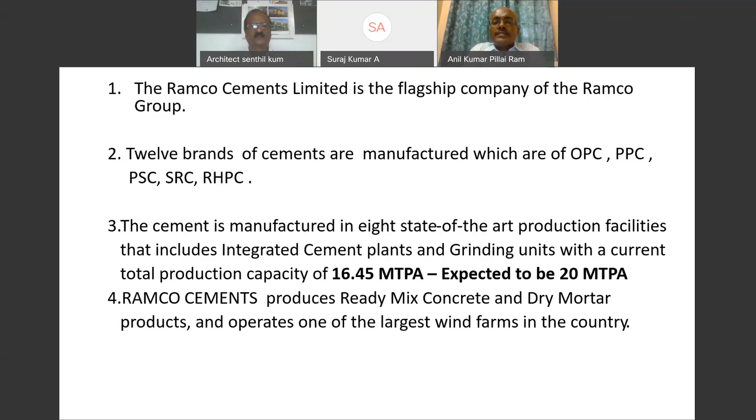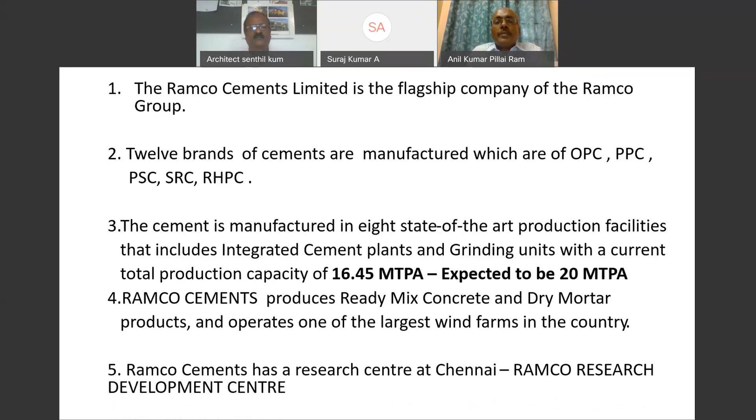Apart from manufacturing cements, Ramco is also involved in dry mortar products as well as ready-mix concrete, and we operate one of the largest wind farms in the country, related to renewable energy. We also have a research center at Chennai, the Ramco Research and Development Center, which engages in the testing of cement as well as raw materials for the manufacture of cement and the concrete mix designs.

Just a brief overview, because there are some questions on which cement is better for building construction, that's why we manufacture all these types of cement. Ordinary Portland cement has 4 variants, specifically meant for infrastructure works, where you need longer slump retention time in concrete, so one needs to go in for 43 grade infra or 53 grade infra. Then for precast items, we have the rapid hardening Portland cement, the Ramco Super Fast.

Portland Pozzolana cement is the cement which has to be used for all normal residential buildings, because it gives the advantage of both durability and compressive strength. Within that, we have Ramco Super Grade. Then a special cement for concrete, Ramco Super Crete, which has a high rate of gain of strength as well as low heat of hydration, so that is the advantage of that.

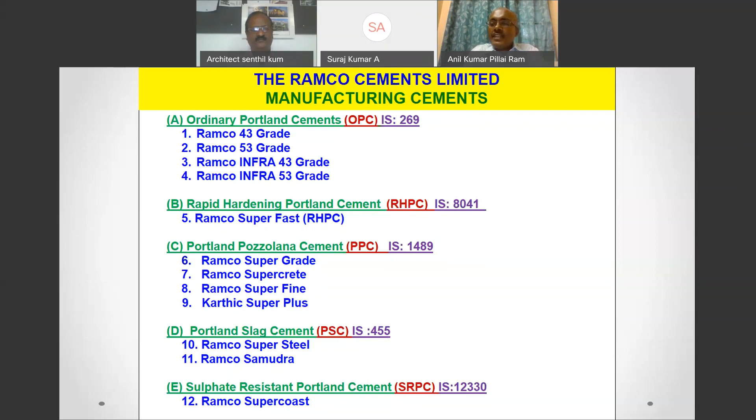Then we have the Portland slag cement, Ramco Super Steel, Ramco Samudra, which is basically sold in the eastern part of the country. And then we have the sulfate resisting Portland cement, the Ramco Super Coast, which is used in areas where there is high percentage or high concentration of sulfates. So these are the 12 types of cement, and what we normally advise for building construction is the Portland Pozzolana cement as well as the Portland slag cement. Basically, PPC is widely being used for all building construction across the country.

Some of our major customers, which I'm not going to go into detail, but just for the benefit of the viewers, L&T is using our cement for a variety of concreting works at various sites, for concrete which is exposed to different exposure conditions.

ITD Cementation Company, which is also involved in various works, especially ports, infrastructure works, and many construction companies in the eastern part of the country, Haldia Development Authority, and institutions like metro projects such as Bangalore Metro and Cochin Metro have approved our brand. This is an overview of our research and development center at Chennai on the old Mahabalipuram road, where we are involved in various types of tests.

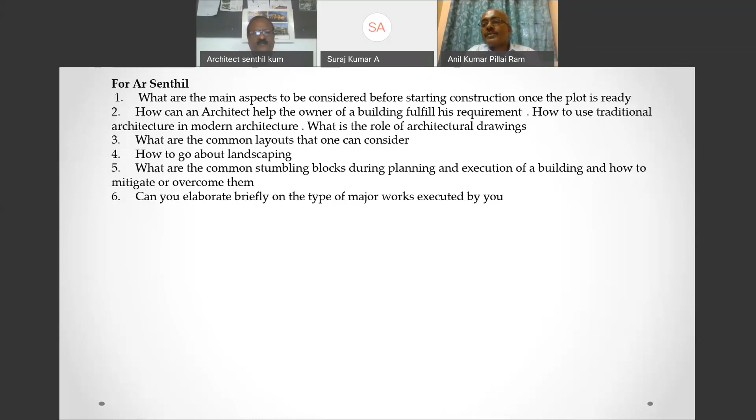We have a combination of questions received from customers, ranging from architectural to civil, and we will be taking each one. But before that, let me invite architect Senthil Kumar to touch upon the main aspects to be considered before starting construction once the plot is ready, how an architect can help the owner fulfill his requirements, common layouts one can consider, and about landscaping, so it would be useful for viewers, both customers and construction professionals.

Over to you. Thank you, Mr. Anil. The mic is, I think, now unmuted. Is it audible now? Yes, now it is audible.

I should extremely thank Ramco Cements for giving me this opportunity, Mr. Anil Pillai and Mr. Suraj, to interact with you and clarify your doubts, and to share my views on this subject. Mr. Anil Pillai, you've put forth a lot of questions to me. Do you want me to answer them first and then go to the PPT, or whichever way you prefer? Would you like me to repeat those questions?

First, many owners would be willing to know the main aspects they should consider before starting construction, once the plot is ready. Once the plot is ready, you'll have to get approval from the concerned authorities. Most approvals have become online now, no more manual processes. You have to upload it online, whether it's a municipality, a corporation, a village, or a city. It has to be uploaded only online, so the approval process has to be clearly done.

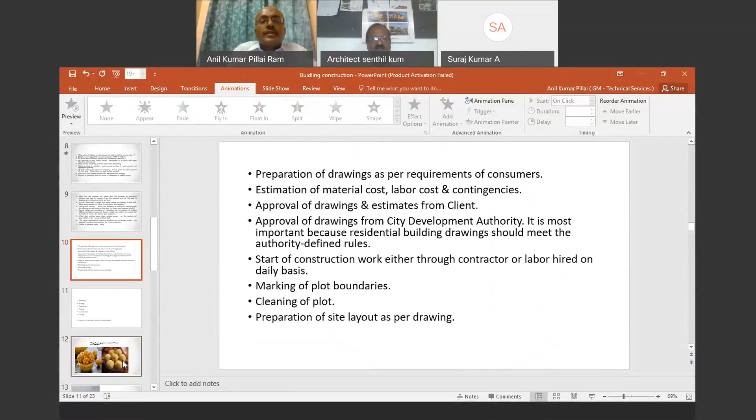For example, I think one of the most important things is that many customers would go in for concreting. So while concreting, a good plan is essential, right from batching. Batching means how we are going to mix, whether in terms of volume or weight. Then mixing, whether we have an adequate mixer machine at site, how we are going to transport the concrete, how we are going to place the concrete, and compaction and curing.

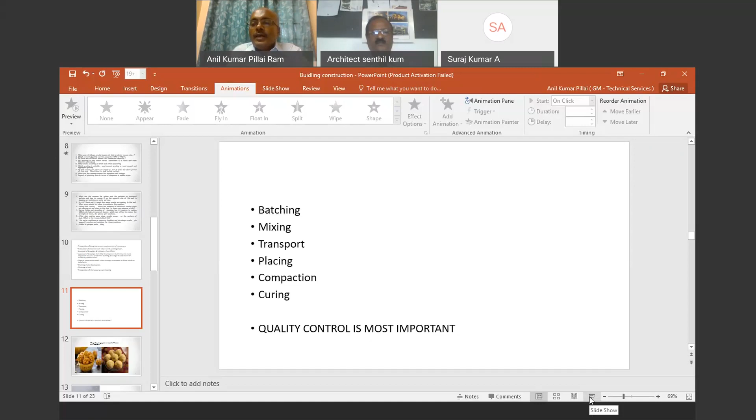Quality control is the most important aspect, as we all know, in concrete construction. Without quality control, you cannot make good quality concrete. Many problems, like leakages, can be avoided if you are doing very good compaction along with good quality concrete, and curing is very essential.

I would like, since most of them are customers, to explain the various sizes of aggregates, which is very important. Like this typical sweet we have in South India - the first sweet where you have kadalai mittai, which has only coarse aggregate, and the other has only fine aggregate. So a combination of coarse and fine aggregate is what we need for good quality concrete.

In the first picture, you could see there is almost only coarse, and here there is fine. What happens if we combine this coarse as well as fine aggregate? That is where the role of 10mm, 20mm aggregate and sand comes into play.

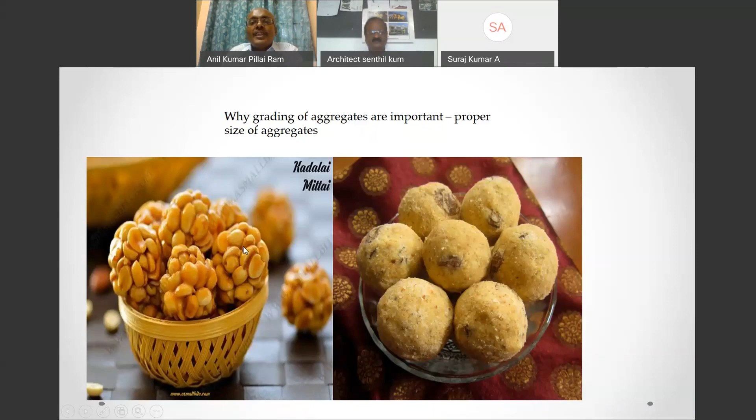So when we are able to mix both of them, we get a good quality concrete. Another thing is the water cement ratio. Say, for example, you buy the best quality cement, you have the best quality sand, you have the best quality aggregate, but if your cohesion is not good, and if the consistency is not good, I think your output would not be good at all. So it is very important that we pay attention to the quantity of water being added.

And have a very good water cement ratio. Another thing is that when we talk about batching, placing, compaction, curing, all the steps have to be followed if you have to have a good quality concrete. Similar to how we make a chapati, you got to have the best quality flour, mix it so there is no excess water, and while making it, ensure it comes out very well. So similar is the case with concrete as well.

So those are some of the good quality construction practices which one must follow to make a good quality concrete. Pay attention to all that, and then you may not have to go in for repair of cracks. Cracks will not occur if your water cement ratio is good and if you're able to do effective curing. Hairline cracks will not occur if you pay attention to that.

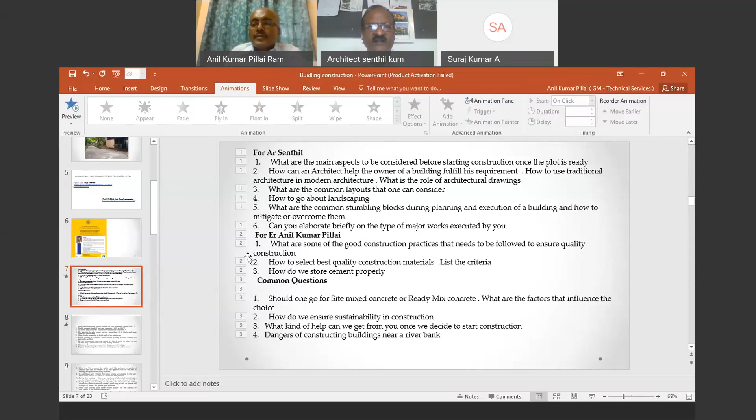And the client will not have the time to go to the site and check all these things. So a site engineer has to be appointed. Normally, the civil contractor who undertakes a job has to have a site engineer at site. These labor contractors will not have site engineers, so it becomes a big headache. So you always give it to a contractor who can afford to have his own site engineer who will come to the site, because you cannot expect the contractor to come and stand there full time and see the quality of construction. So the site engineer's job is a must.

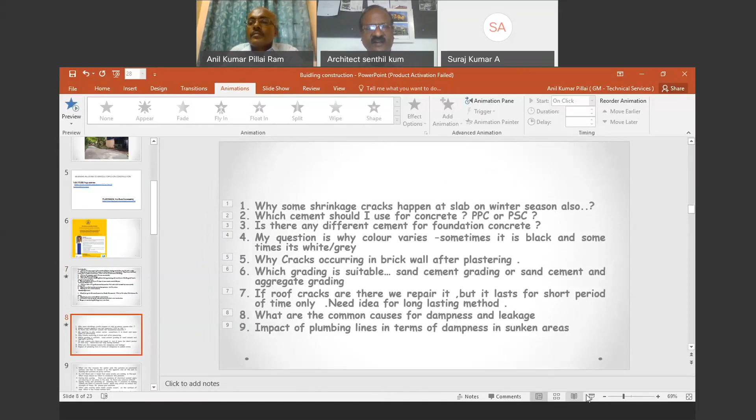For small works, the contractor himself can appoint the site engineer. For big works, the client has to appoint the site engineer. It is the site engineer's job to check all the quality of works and report to the architect, civil engineer, or structural engineer. For example, after concreting, how the concrete quality has come. We normally see cracks happening in ready mix concrete, so if cracks are happening, what is the reason for that? All these things should be observed and reported to the structural engineer, who'll give the remedies. So the site engineer plays a very important role in all the sites.

That's what some of the questions that have been asked, I think already it has been answered. Some shrinkage cracks happen at the slab even during winter season. Why? Because many times excess water cement ratio is also being used. For example, if we have a very highly flowable concrete and we do not do the curing, then shrinkage cracks will occur. So as rightly pointed out by architect Senthil Kumar, we must be having a very good civil engineer who would be able to supervise that.

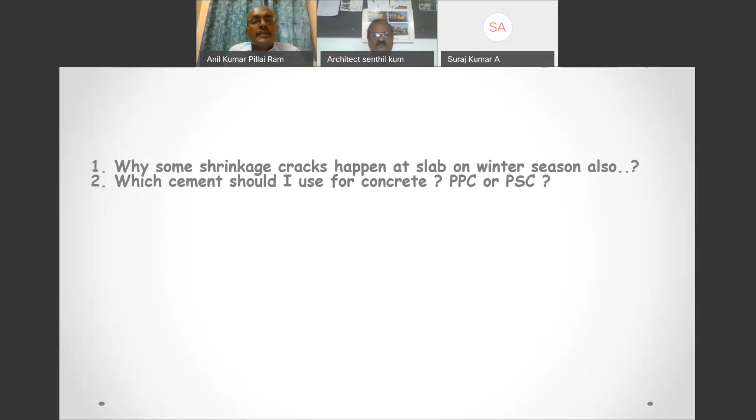And which cement should I use for concrete? If you are using it for building construction, I would recommend you go for blended cement. But for ready mix concrete, normally use ordinary Portland cement because they have a separate blending material which they are able to procure, but at site we are not able to mix blending material along with cement. The role of blending material is that you will be getting a low heat of hydration and enhanced durability. Is there any different type of cement for foundation concrete?

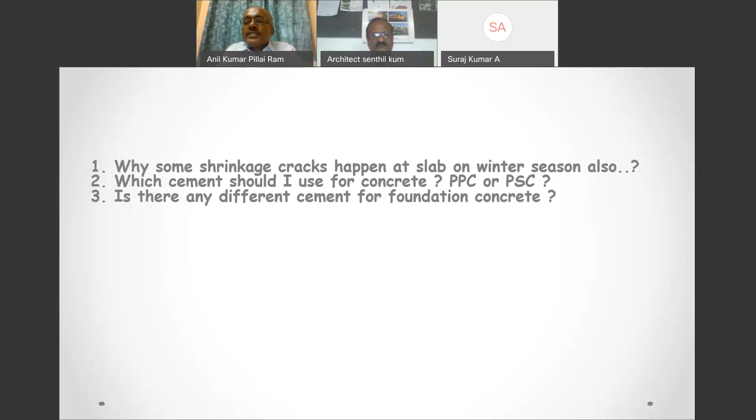I think for all concrete, if it is M20, M25 grade, it all depends on the mix design or the mix proportion that one is using. So why does color vary? Actually, there is one question regarding cement. I think the color of the cement varies from dark gray to light gray.

There is no standard color prescribed in the test certificate, because the test certificate talks about setting time of cement, compressive strength of cement, fineness of cement. It does not talk about color. So you don't have to worry about the color of the cement. It is not an index to quality. That is very important.

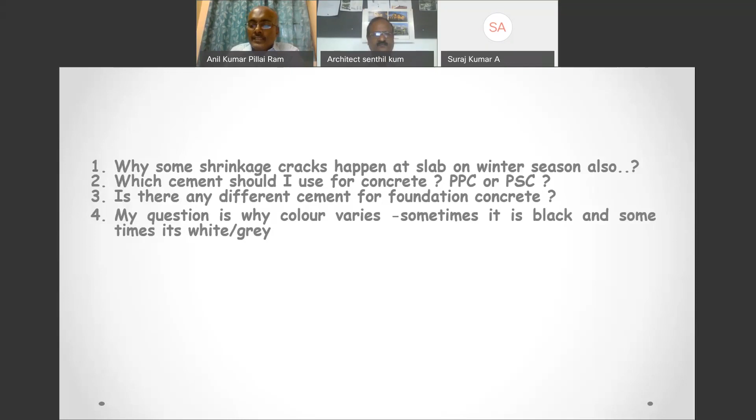Why do cracks occur in brick walls after plastering? I think this is an important question. Bricks have to be soaked before using, otherwise the brick will absorb water from the plastering, and if the plastered surface is not cured properly, you will get hairline cracks.

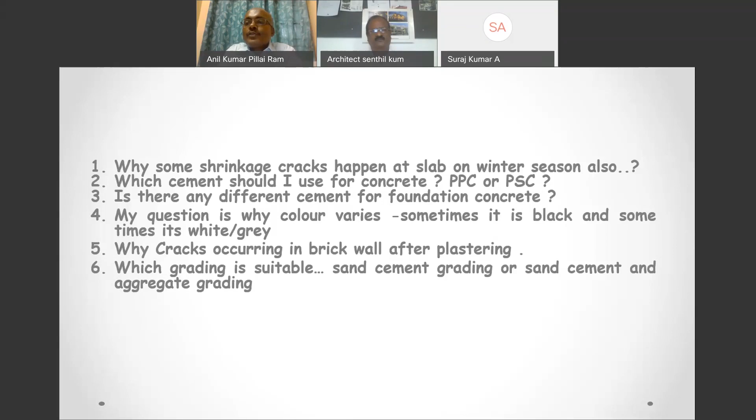Which grading is suitable, sand cement grading or sand cement and aggregate grading? Sand cement grading is used for plastering, and sand cement and aggregate is used for concrete, as simple as that. So if roof cracks are there, we repair it, but it lasts for a short period of time.

Need an idea for a long lasting method. We should ensure that the concreting is done in such a way that no cracks occur, because prevention is better than cure. But if cracks occur, then it has to be done by a professional, who opens it up and puts in some kind of compound. But it is always better to take preventive measures to avoid hairline cracks.

What are some common causes for dampness and leakage? I think dampness and leakage occur because of inadequate compaction. So compaction during concreting is very important, and we need to pay more attention to that.

Regarding the impact of plumbing lines on dampness in sunken areas, we need to plan the plumbing lines effectively, as the speaker has stressed. Even on the terrace, we need to plan it so that you don't have much leakage. So these are some of the questions we have been able to take care of.

Anything you would like to add on these questions, architect sir? Yeah, most of them are related to structural aspects.

The structural engineer also plays a very important role in buildings, and you should make sure that the structural engineer visits the site at the time of concreting. He has to come and check the reinforcement before concreting, whether it is done as per his drawing and requirements. If anything has to be redone, it has to be redone, and he'll give instructions. During concreting also, we have to follow the structural engineer's instructions, and he plays a very important role.

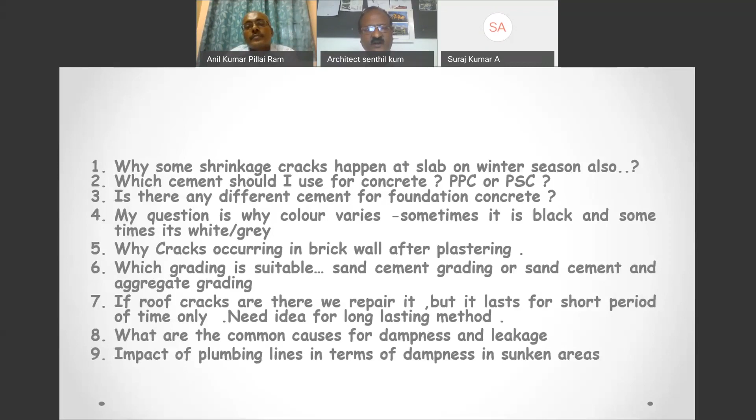So without the structural engineer, you should not construct a building. Sometimes the masons will say, sir, this reinforcement is enough for the column, we'll put 4 number 20 mm bars for the slab. You have to have a structural engineer depending upon the soil condition.

So soil testing is also very important. Depending upon the soil testing and the type of soil, your structure will be calculated. The structural engineer plays a very important role, and you can save enormous cost on the building.

If you go through unorganized professionals, they will put reinforcements as a thumb rule, and the cost will become high. If you go through a professional like a structural engineer, then you can economize on the cost, and the building safety will also be ensured.

The safety aspect, nowadays earthquake resistant buildings are a must. As per the IS code, your buildings are to be designed, the columns are to be designed to withstand the earthquake. So all these aspects have to be considered while designing the foundation and all the structural aspects of the building.

I think what is very important is that structural drawing is also important along with architectural drawing. That is very important. And as rightly pointed out, most of these problems mentioned here can be sorted out if we plan it properly and go through a professional.

For example, patches on a plastered surface happen because plastering has to be done very professionally to avoid patches or cracks. The right kind of mix proportion has to be used, whether it is for ceiling plaster or wall plaster. Ceiling plaster has to be slightly rich, sometimes they use a 1:3 mix, while wall plaster goes for a leaner mix. We also need to ensure that in AAC blocks or brick walls, the blocks are sufficiently moistened.

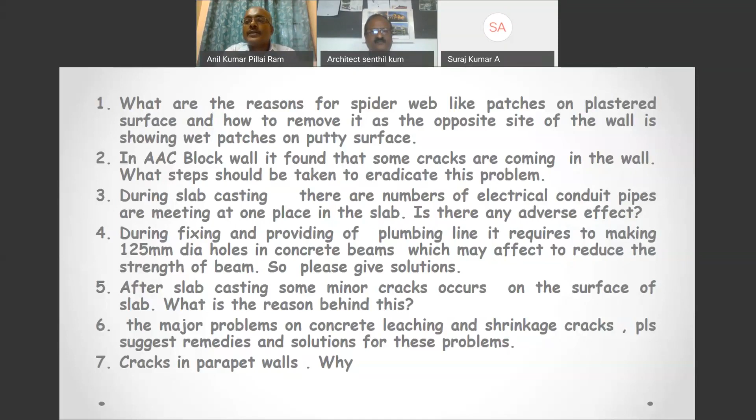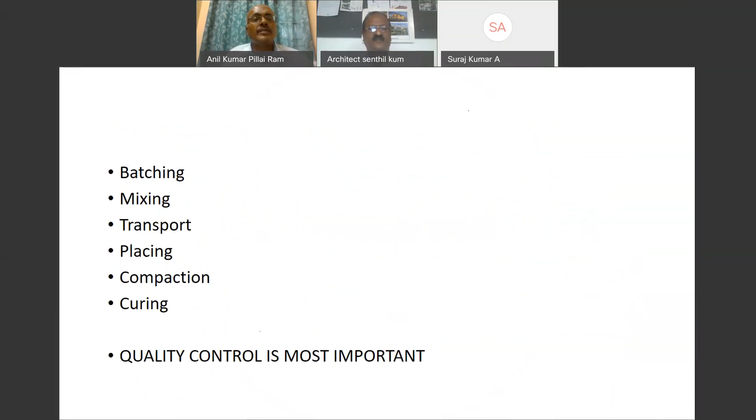So these are some of the answers to the questions which are there. Anything you would like to add on this? I think you have clearly explained these things. We will go to the next. Yeah, so these are some of the questions. I think now you can show the projects that you are having. We have almost covered, and you can carry on with your presentation.

I'll try to show some of the projects. I think you will be, yes please. You can share your screen there, then I will come back to this. Some of the projects executed by you would be an eye opener for all of us to see how we can.

Yeah, I think from the design perspective, these are some of the 10 elements we can consider when one designs a building.

Always you should involve nature in the building. Nature has to be a part of it. Whenever you design a building, you have to bring nature into your building. Then only your building will become timeless.

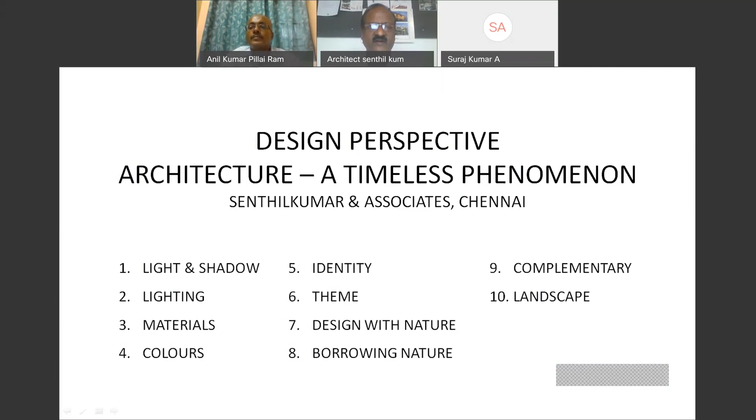In this, you should just show some of this. This is my residence in Manapakkam. You can see the solids and voids. Are you able to see my mouse? Yes. So this is the eastern side.

Always we should allow the eastern side to fall in the building. That's why the building has got, this is the master bedroom, it has got a stagger, the dining has got a stagger, and the living has got a stagger. So the eastern sunlight will fall in the kitchen, which is very good, which will kill all the germs, and then eastern sunlight will fall in the dining, and eastern sunlight will fall in the master bedroom.

As per Vastu, they say that the master bedroom should be in the southwest corner. From the southwest corner, having the bedroom there, how do you bring the eastern sunlight? That's a challenge. If you just stagger it, you get the eastern sunlight, while still having the bedroom in the southwest corner.

And there's a big landscape. Here we are able to have a huge beam, without any columns in between, for a 36 feet span, with only 2 columns. We can accommodate 4 cars comfortably inside, with no columns in between, and the slab has been sunken.

On the top, we are able to accommodate a roof garden on the first floor. You can see the landscape occurring here, and the sunlight comes to the pergolas. So nature has to be integrated into the building wherever possible.

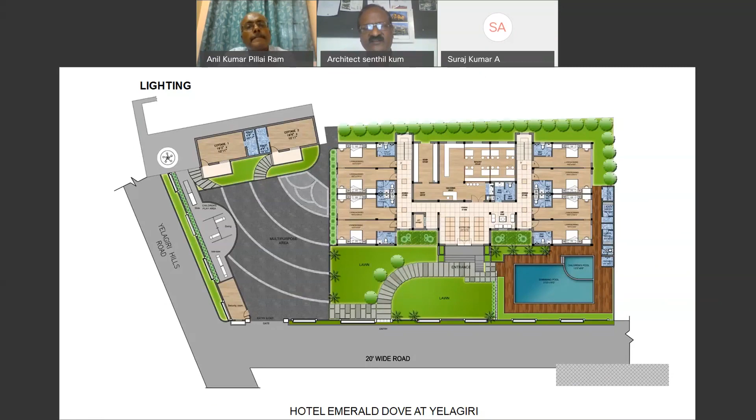Again, for good ventilation, we have this sort of jalis, which also gives privacy. This allows the wind to come into your rooms, and at the same time gives you privacy also. A lot of jalis are being used in Indonesia, and this gives a very nice lighting effect during daytime when you see the light. Especially on the walls facing west and south, to avoid glare, you can have this.

This again is a school project we have done. For schools, we go for the bright colors. Always in school, you should remember that the school will be constructed in phases. The elevation cannot be attained in only one stage. First year they'll construct something, second year they'll construct something, third year they'll construct something. So the building has to be envisaged in parts.

When you design the elevation, you design it only for the first year. Then again it has to be built for the second year, third year. So it has to be built in components. That is the message I'm trying to convey here.

Nowadays we see a lot of these glazed buildings, Alucobond, and glazings which have no character. Initially, when you see a building in Kerala, you can say that building belongs to Kerala only, because they'll have typical Kerala architecture, like large overhangs to cut the rain coming into the building, and for ventilation. But nowadays this universal modern trend has come, in which throughout India the same style has been followed, which maybe we are getting influenced by the Western era, but which is not a good trend.

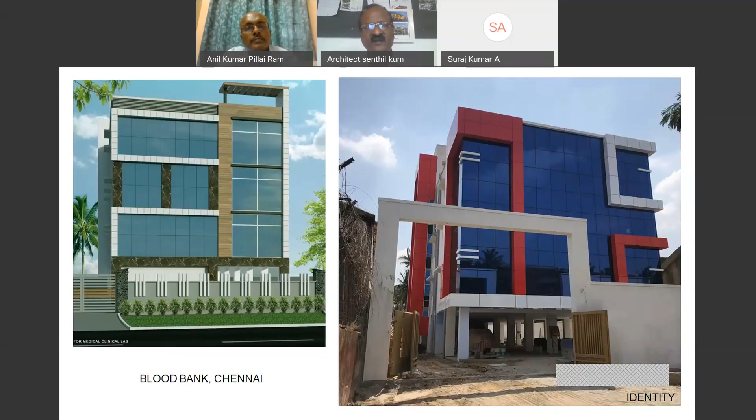And what is the life of these buildings? What is the life of this external cladding, and what is the life of this glass? Hardly 5 years or 10 years, something like that. But just to make a show, people are doing this, and this has to change. Your building should be responsive to the local climatic conditions, depending upon the locally available materials, and using the locally available masons and skilled laborers. That's how the building has to be designed.

See, this amphitheater, which we designed at National College Trichy, we used bricks from Kerala. The amphitheater has been designed like a musical instrument. This is like a piano, and the amphitheater is also designed like a flute. The flute will have 7 holes, 6 holes continuously, and the 7th hole will be at the last. When you see it clearly, you can just understand.

So whenever you design a particular place in a public area, you can have a theme, and the theme will add value to it. Here, music is the theme, like the piano type stage, and then flute type tiers, using all natural materials. This plays an important role.

This again is the ITC Welcome Resort on the ECR. You should not cut the trees. Maximum, you should try to fit in the requirements on the site, taking into account all the existing trees. That's one of the most important aspects which you have to consider when you plan the building.

See the lobby also, it is not air conditioned. When you enter into the lobby, it is fully open because the Bay of Bengal is here, and the breeze will flow through it, having a tunnel effect. You don't require any fans, no artificial light, nothing. Only at night time will you be requiring it. So the lobby has only the side walls and the roof covered. We are trying to borrow nature entirely. This is one of the important aspects.

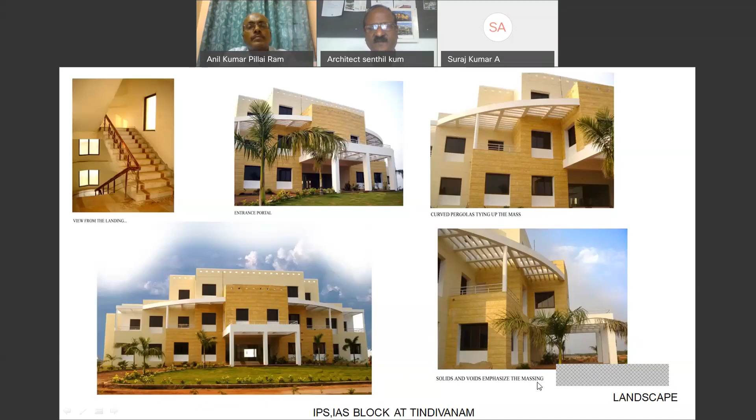It's much easier to go for astroturf, a synthetic lawn. You can conduct parties, put chairs, put the dining table there—whereas with a natural lawn that's not possible, since if you sit on a chair it will sink into the soil and create holes. So I prefer astroturf, with planter boxes for your natural plants everywhere—it's much easier.

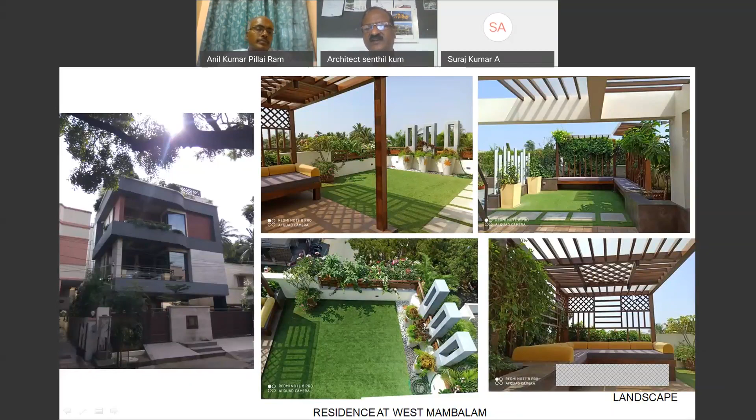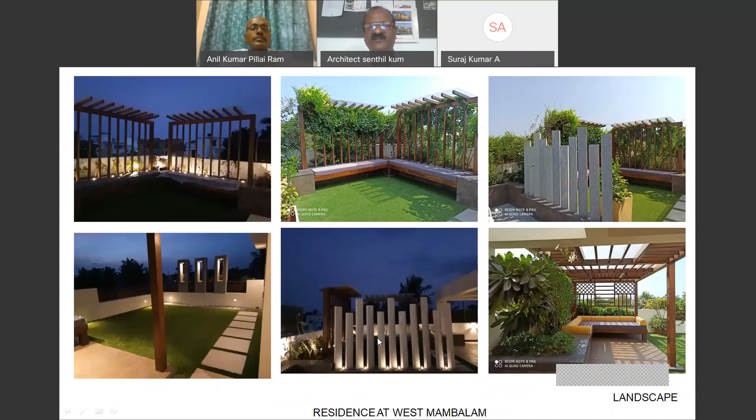These are the pergolas with seatings below, and you can have creepers on top. See these creepers and seatings with natural elements, along with some granite stones.

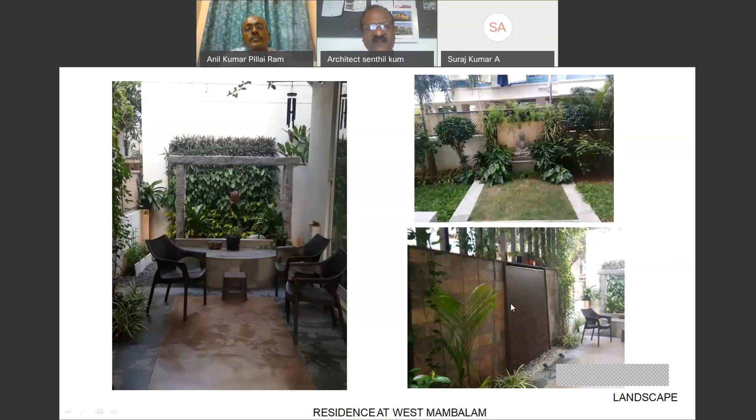That was a very interesting presentation on how you incorporated nature into the construction of the building. As we all know, today sustainability and green building is the order of the day, where we need to ensure that outside light is being used inside the building as much as possible, and that the building consumes lesser energy, because energy consumption is one of the most important things, as well as water conservation.

I think all this goes a long way in making the building sustainable, and that is one of the questions being asked: what do you mean by green building? I think this is what green building is all about - when we are able to incorporate the functionality and elements of nature. I'm sure with your expertise, especially during COVID time, we need to avoid the usage of air conditioning as much as possible. That is the message being given.

So how do we ensure that outside air and ventilation is being followed? I think that is a very interesting phenomenon that is going to happen in the coming days. And you have already implemented this in most of your projects. That's very interesting - you have to have cross ventilation. Cross ventilation, that is very important.

So let me just show some of the presentation. There are some questions on which sand is better and all that, so let me just show some presentation on that. Suraj, can you just convert that? Yeah.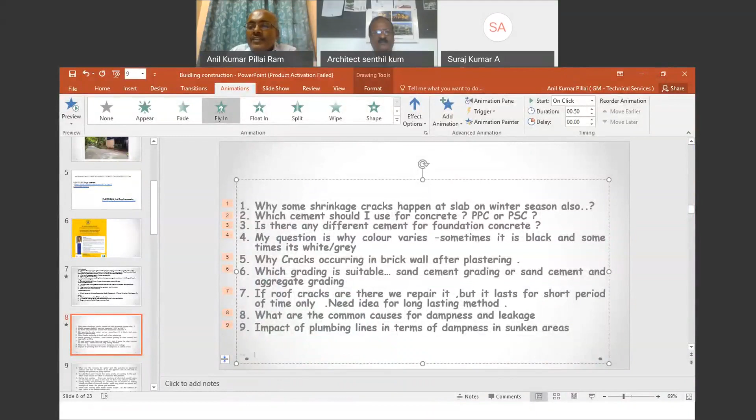There is a question on which is better, whether M sand is better or river sand is better, because that kind of question is always coming in the mind of construction professionals.

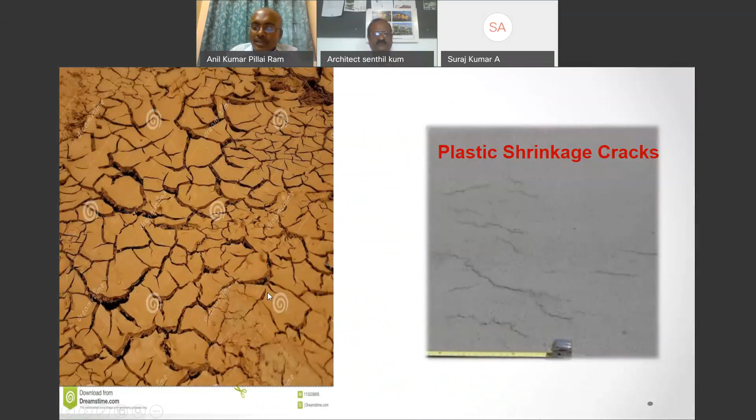Just before I go to the other thing, a comparison of why curing is important. On the left hand side, you can see this mud which is cracked because of quick drying of the surface - that is the reason why this plastic shrinkage crack is occurring. So we need to keep in mind the importance of curing. When a mud itself can get this kind of problem, you can understand what kind of problem occurs when we don't do proper curing.

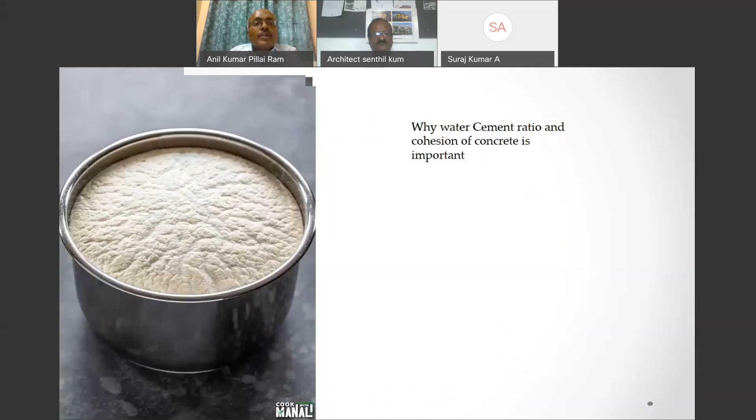Let me go to the question of which is better, river sand or M sand. As we all know, in many places river sand mining is stopped. If you are able to get a better sand which, for example, has below 75 micron fineness with clay and organic impurities almost equivalent to zero in M sand, whereas in river sand it is higher - these kinds of parameters have to be kept in mind.

As we all know, river sand is naturally available on river banks. M sand is manufactured, and in river sand there is no quality control because it comes from natural sources, whereas M sand can be made of consistent quality. It depends on the supplier from where you are taking it, because at times you will find fine materials below 75 micron - if dust is higher, it can create problems in concrete. So we need to look at the sizes of the sand and whether dust is minimized or not.

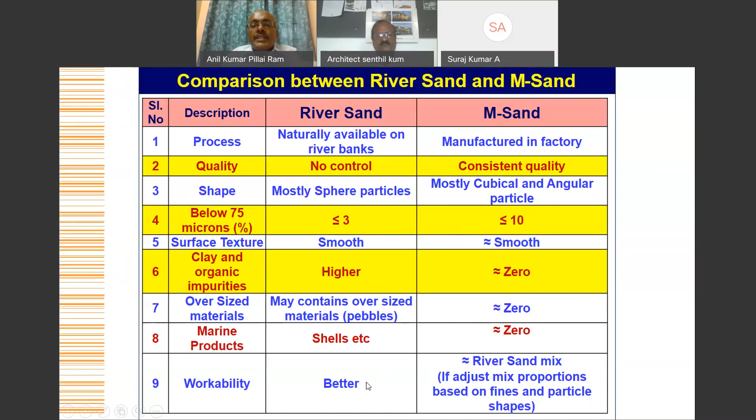Workability is better in river sand, and with M sand we can also adjust the mix proportion based on this. On strength, we have done a lot of mix proportioning using our Ramco Supercrete along with M sand, and we have seen that the compatibility is good. Many concrete structures nowadays are going in for M sand, so there is no question of asking which sand is better.

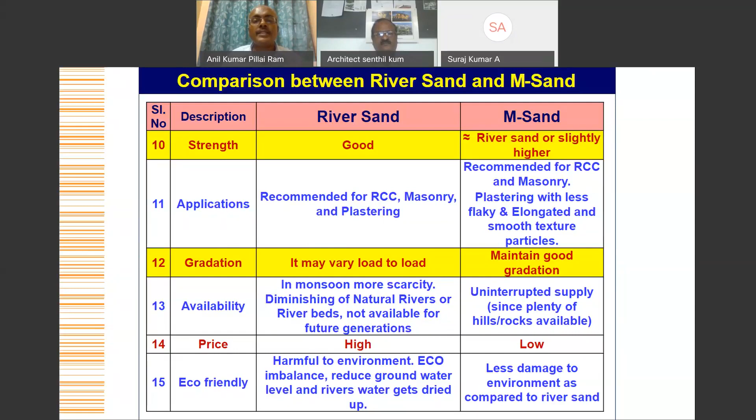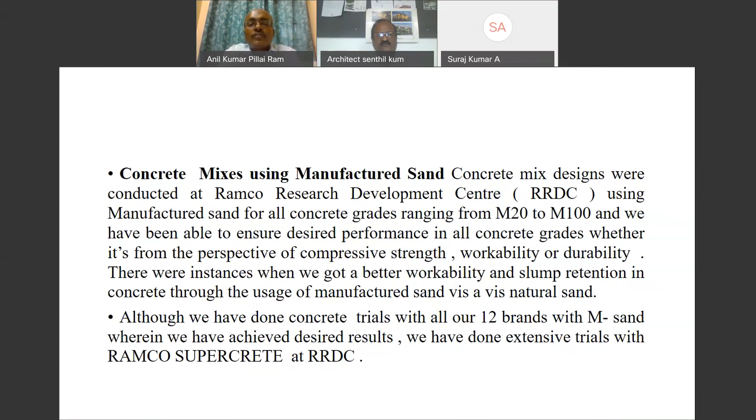As long as we ensure that the sizes, the gradation of sand and gradation of coarse aggregate, are both combined properly, there should not be any problem. At our research center, we have done this for concrete grades of M20 and higher using manufactured sand, and we have seen that the compressive strength, workability, and all required parameters are of good quality. So we have been able to achieve that in our research center.

One important thing someone was asking about is the quality of construction material. I think it's always better to ask the supplier or manufacturer for a test certificate. In case of concrete, you can only get a test certificate for cement, but what about the quality of other ingredients? We need to look at the quality of sand as well as aggregate, so that you can make good quality concrete.

Just a brief overview of the cement test certificate: it will give you the fineness of cement and normal consistency. Fineness is very important for hydration of cement, because cement reacts with water to form these products. Then you have initial setting time, final setting time, and soundness of cement, which is related to durability. Compressive strength is given for 3 days, 7 days, and 28 days, which has to be looked into, along with the chemical requirements, which are very important from the durability perspective.

So you have all these parameters. Before you use the cement, always insist on the manufacturer's test certificate, so that you get a better idea of what kind of material you are taking.

In our case, we have been giving Ramco Supercrete for concreting applications, which is a Portland Pozzolana cement having a high rate of compressive strength, adequate fineness, low heat of hydration, and controlled particle size distribution, which gives you an impermeable concrete.

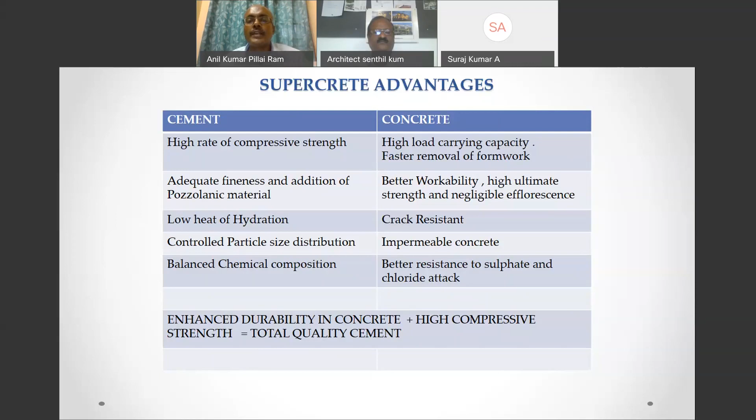What's important is that nowadays, if you look at the codal specifications, more emphasis is on the durability aspect. For example, IS 456 talks about sulfate attack, chloride attack, underground works, and all of these need to have these durability parameters.

We also have civil engineers from Ramco Cements stationed at different places in the country, and you can always get help from them in ensuring that the concrete is of good quality, because we give technical services to help small project sites measure the workability of concrete using slump cone tests.

For example, the slump cone test can be used to measure workability. By that, you can always sensitize the concrete-making person to control the water cement ratio. You can take concrete cubes and get them tested at the nearby testing laboratory. So all this would be very beneficial for you, the services that we are offering at Ramco Cements.

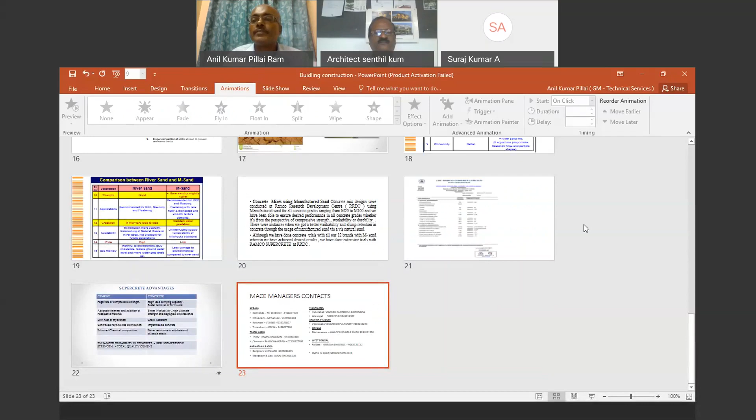Now let us take some of the questions from the chat box, though I think most of the other questions we have already been able to cover.

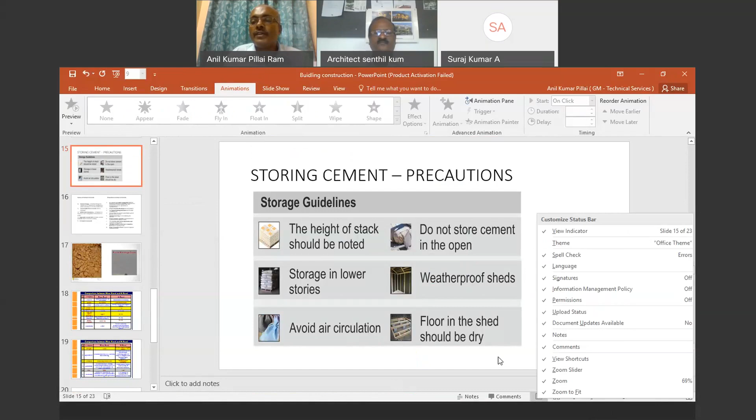Just a brief overview of precautions to take while storing cement, because this is one point that many customers do not pay much attention to, especially in monsoon season. Please ensure cement is protected from moisture—not only water, but also moisture-laden air. We need a dry floor and weatherproof sheds, and should not store cement in the open, especially during monsoon season, because it will get hydrated and you won't get the full benefit of the cement.

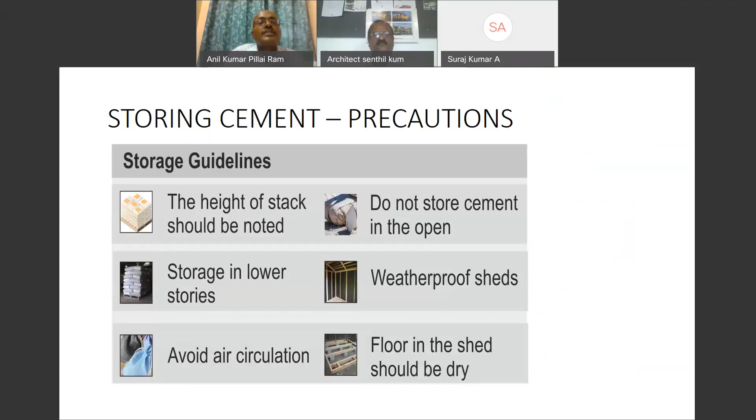Regarding the height of the stack, sometimes cement bags are stacked more than 15, 20, 25 bags high, due to which the lower bags will get hydrated. These are some things we need to keep in mind. Avoid air circulation issues—this is the basic approach to how cracks can be avoided.

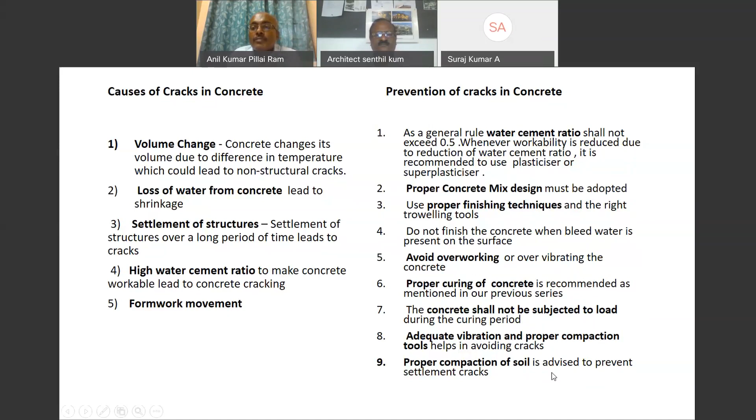Proper curing of concrete is very important. It shall not be subjected to load during the curing period. Adequate vibration is also needed, but in some places you don't even have a needle vibrator, so compaction is being done using reinforcement rods, which is not correct. Proper compaction of soil is advised to prevent settlement cracks, so settlement cracks need much attention.

So overall, to summarize building construction, as our speaker was also insisting, before we go ahead with construction we need to ensure proper approval is obtained from the local authorities. Preparation of drawings is very important, and estimation of material cost, labor cost, and contingency is very important. Otherwise, there could be disruption in the work.

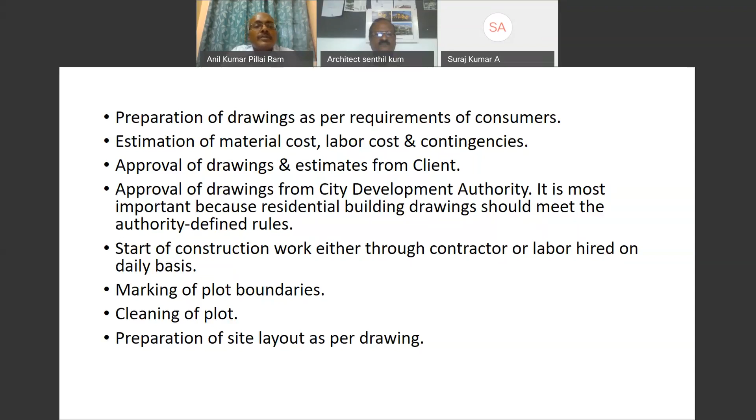We need to follow whatever city development authorities or local regulations are there, and in this age we have an online approval process available. So these are some of the points we wanted to summarize, and I am sure this would help you in making a building which is durable, of good quality, and has a longer life, because that is very important. So let us take some questions.

Regarding carpet area, there is a question. He wants to know what carpet area is, and what the difference is between plinth area and carpet area.

To tell you in a simple way: wherever you'll be able to lay a carpet, that is the carpet area. For example, if a wall is there, you cannot lay a carpet there. So the floor area where you can lay carpet is called carpet area. The floor area plus the wall area is the plinth area, which is the plinth area on the ground floor. As simple as this.

I think you have put it very simply, so that is very useful for everyone.

What is the minimum grade of concrete to be used in PCC and RCC? I think as of now, IS 456 specifies that for RCC you have to use M20 grade concrete, and based on exposure conditions the grade of concrete will increase. For example, if you are constructing a building near marine areas, you should go for M25 or M30; otherwise normally RCC M20 grade concrete is sufficient. For PCC, M10 grade concrete is sufficient for plain cement concrete.

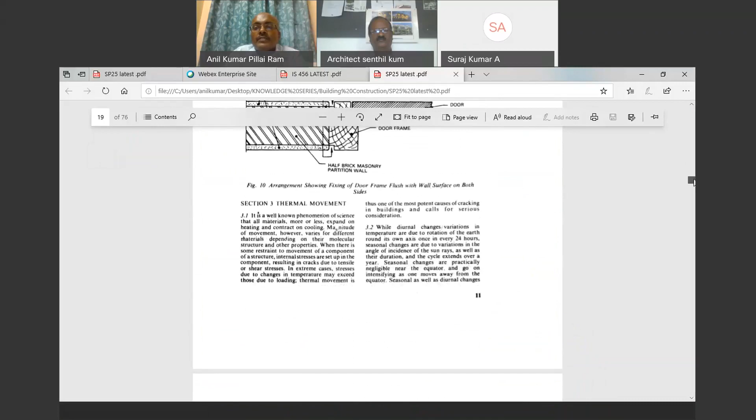You'll find that different types of cracks are clearly mentioned here—why a horizontal crack occurs and how it can be avoided. The details are mentioned in the code itself. For example, this kind of horizontal crack at the support of brick-cum-iron railing over an RCC cantilevered roof slab occurs due to differential shrinkage and thermal movement, and this has to be avoided in certain cases.

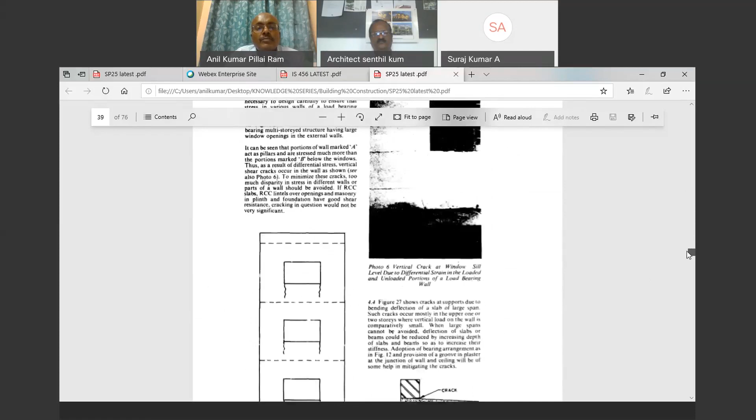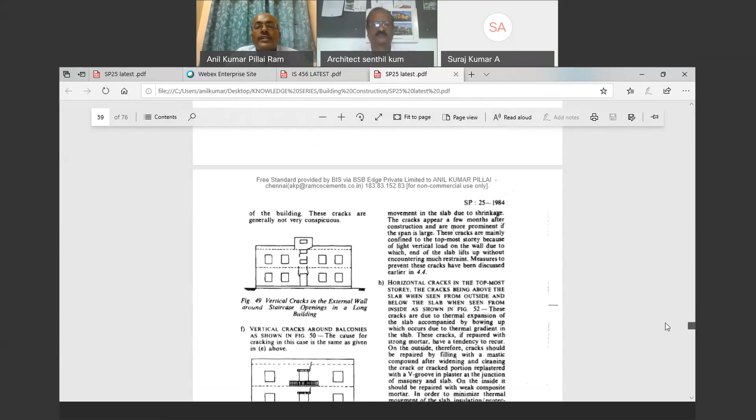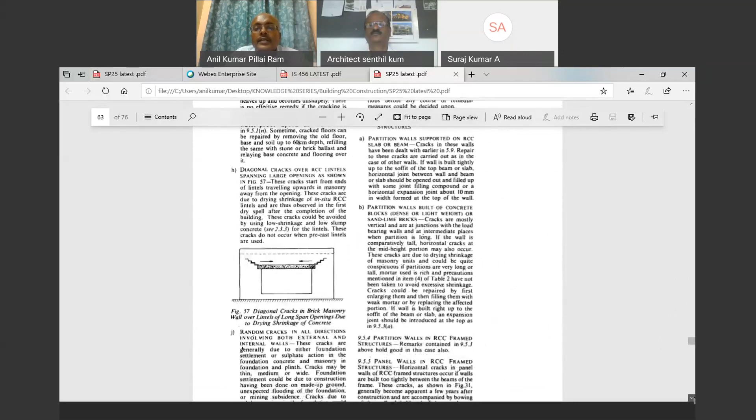Let me go to page 55 and 56 of this code, since some were asking about cracks in parapet walls, and you'll find that mentioned here. I'd request all customers and construction professionals who have logged in to go through this code, which is very handy for ensuring buildings and structural components don't crack. There are so many types of cracks you could see.

Now, freestanding walls such as compound walls or parapet walls - why does this occur, and what are the reasons? These cracks occur due to drying shrinkage combined with thermal contraction, and cracks tend to close in hot weather. If wide enough, cracks may be repaired by enlarging them and filling with weak mortar.

If no expansion joints have been provided earlier, some of the cracks may be converted into an expansion joint. One very important message is that if you have a long building, please give provision for joints, which is very important to ensure that the concrete can expand and there is space for it.

These are some important things given in this code, and I would strongly recommend you visit the website of Bureau of Indian Standards and look at these codes to ensure your building doesn't crack. Two important things we have seen are that many people grapple with the problem of cracks, especially in summer, and during monsoon they grapple with dampness and leakage, which can be avoided with good quality concrete.

So with those words, let me thank all of you for logging in. Architect Senthil Kumar gave us a very good overview of how we should merge nature into our building designs, construction, and operation. When we merge both these elements, you will have a habitat where you feel enjoyable and very happy.